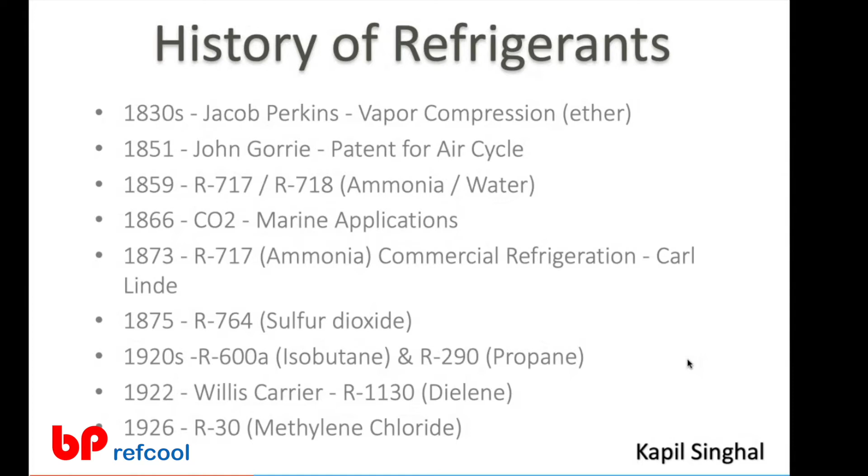But if you see all these refrigerants, there was some problem or other. Either they were toxic, or they were flammable, or they had stability issues, or they were not giving the desired cooling effect.

So what industry said was that they want something which is non-flammable, should have good stability, it should last till the system life, and should have low toxicity, because if it leaks out, there are people around, it should not be highly toxic, and it should have a boiling point of minus 40 to 0 degree centigrade. Now, this is something which is very interesting.

In the 1920s, when industry was looking for a good refrigerant, at that time they listed down this requirement of minus 40 to 0 degree centigrade. Even today, it is somewhat correct, but not for all the cases. So why this boiling point? The rest we know: non-flammable, non-toxic, good stability. We know why they were looking for those, but why were they looking for minus 40 to 0 degree centigrade of boiling point? This is something which is interesting.

As we talked about the evaporator, what they were considering at that point in time was that people are going to use this refrigerant for air conditioning. Say, for example, if you want a 20-degree temperature in the room, then you need 10-degree air temperature. If you need 10-degree air temperature, that means your coil temperature on which we are going to get the cooling is going to be around 0 degrees centigrade. Now, a 10-degree delta is what they were taking in the 1920s we are talking of.

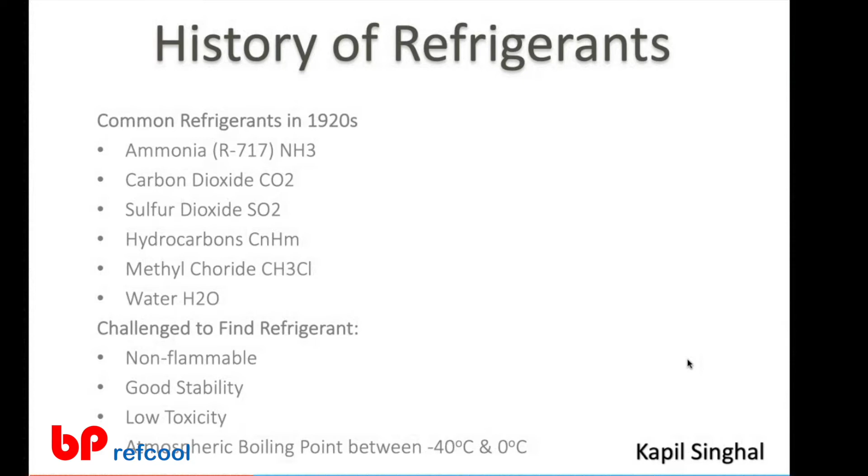In 1928, Thomas Midgley, who was working with GM, came out with a refrigerant called R12, which was known as Freon 12, because this General Motors subsidiary, Kinetic Chemicals, was then taken over by DuPont, which is now named Chemours. In 1928, he came out with 12, which was meeting all these requirements. 12 has a boiling point of minus 29, and is non-toxic, non-flammable, and all that stuff. So everything went well with 12.

There were other refrigerants which came out later on, like 22, 11, and others, because when you are developing applications, other things also came up. But the interesting thing came in the 1970s, when the concern of ozone depletion was studied by Rowland and Molina, and they showed that these CFCs are very stable, because industry in the 1920s was looking for a stable substance. They were so stable that they will not break down for hundreds of years. And if they don't break down, these molecules will reach the ozone layer in the stratosphere and then slowly break down over there. And the disaster was that the breakdown components give a chain reaction. So it's not going to just end by breaking down; the components will further break down the ozone.

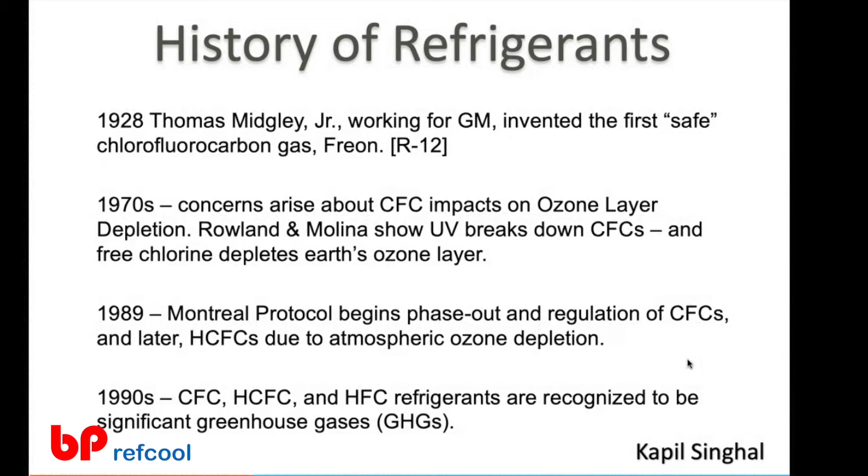That's how the key concern came in, and we had the Montreal Protocol in 1989. This protocol was to handle all ozone-depleting substances, which were majorly CFCs, but also some other chemicals, HCFCs, and other halogenated compounds. This is probably one of the most successful international environmental treaties, where globally everyone came together and very beautifully phased out most of the substances. There are still some left, in some geographies including India, which are still in use, but they are under a phase-out schedule, so they will be phased out soon. In the 1990s, CFCs, HCFCs, and HFCs were also recognized as greenhouse gases. So another set of regulations also started to come.

Now, when we talk of refrigerants, there are a number of refrigerants. In these charts, mainly we will focus on fluorinated ones, because more than 90% of the entire industry works on fluorinated refrigerants. When we talk of fluorinated refrigerants, we are talking of essentially CFCs, which are chlorofluorocarbons.

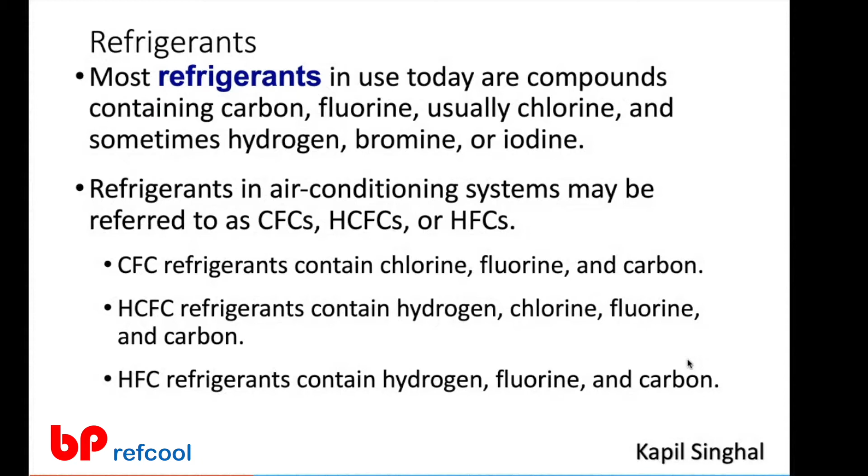These are derived from hydrocarbons, and we have chlorine and fluorine attached to carbons. So it's a chlorofluorocarbon. Then we have hydrochlorofluorocarbon. If we add hydrogen also to CFCs, the atmospheric life comes down. We'll talk about this in later charts, but it is hydrogen, chlorine, fluorine, and carbons. And then HFCs, where there is no chlorine. There are also hydrocarbons directly used, but mainly these are the three categories which are used as refrigerant in our

Now fluorine has very high stability, and it increases the atmospheric life. When it increases the atmospheric life, it is going to have a penalty in terms of environmental regulation, which is global warming. So we don't want that. But earlier, this was something which was very good, so we would use fluorine to increase the atmospheric life. But now we have another challenge of GWP. Chlorine increases the ozone depletion potential. So we don't want higher chlorine, or in some cases, zero chlorine.

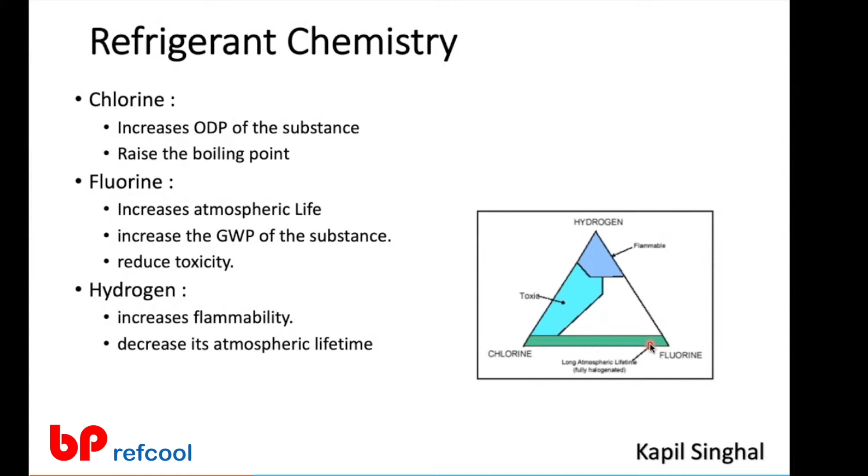So we want a balance. There are problems and advantages of all three. What we need to live with is figuring out what is best for which application. That's why it's not one single refrigerant fitting all applications. There are different refrigerants for different applications. If we talk of CFCs, which is chlorine, fluorine, and carbon, since there is chlorine, there is ozone depletion, because the chlorine is going to break down the ozone layer. So it will make O3 to O2, and that's how it's going to have a problem.

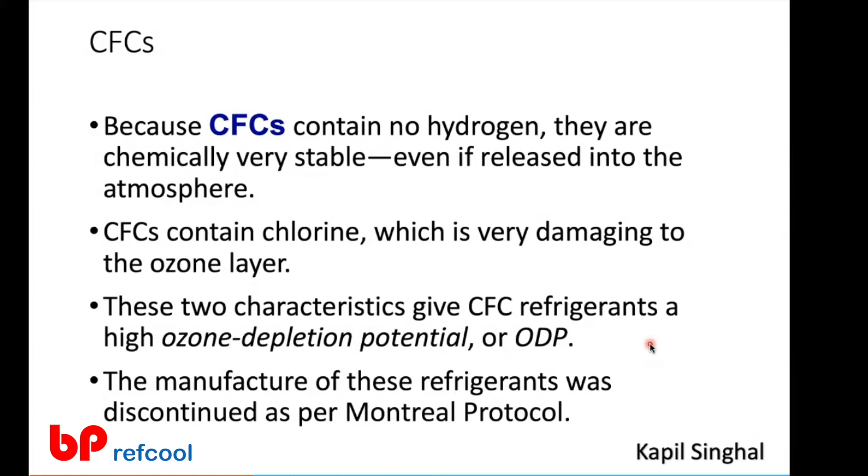Manufacturing of CFC and CFC based equipment has been banned across the globe now. So there is no CFC based equipment or CFC which can be produced for refrigerant application. For certain applications, there can be some essential use which may still be allowed, but for most it is already phased out.

HCFC, as we were talking, when we add hydrogen, we reduce the atmospheric life. Say, for example, for CFCs, if the atmospheric life is, say, 700 years, if we add hydrogen, it comes down to say 10, 12, or 15 years. Now, this 10, 12, 15 years is very good as compared to CFC, but it is still not very good because global warming still has a very big role to play.

In HCFCs, chlorine and hydrogen are both present, so the ability to damage ozone comes down drastically. Say, for example, if CFC 11 or 12 was 1, for HCFC 22, it's going to be 0.055. So yes, it comes down, and that's why there is a different phase out schedule. So 22 is still being used in India. It's under a phase out schedule, so it's going to be 0 sometime. But as of now, some amount of 22 is being used.

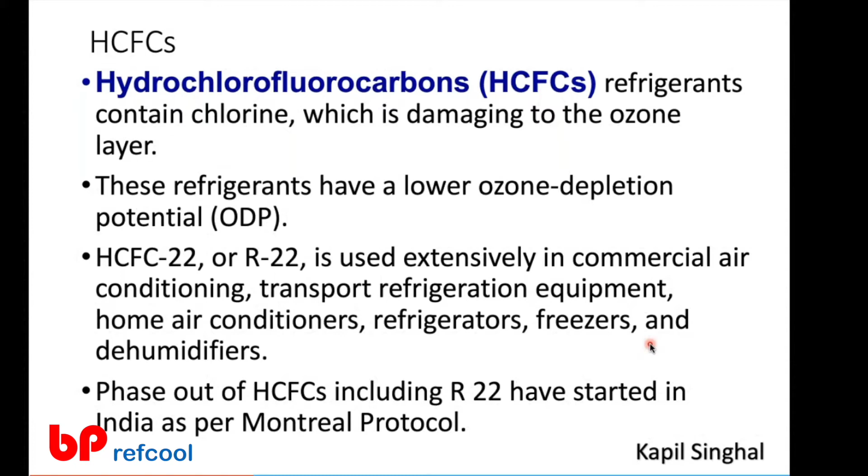If we remove the entire chlorine, we are talking of HFCs, hydrofluorocarbons. Since there is hydrogen, the atmospheric life is very similar to what we have for HCFCs. And since there is no chlorine, there is no ozone depletion issue with it, but there is still a global warming issue. So we need to figure out how to handle this global warming issue.

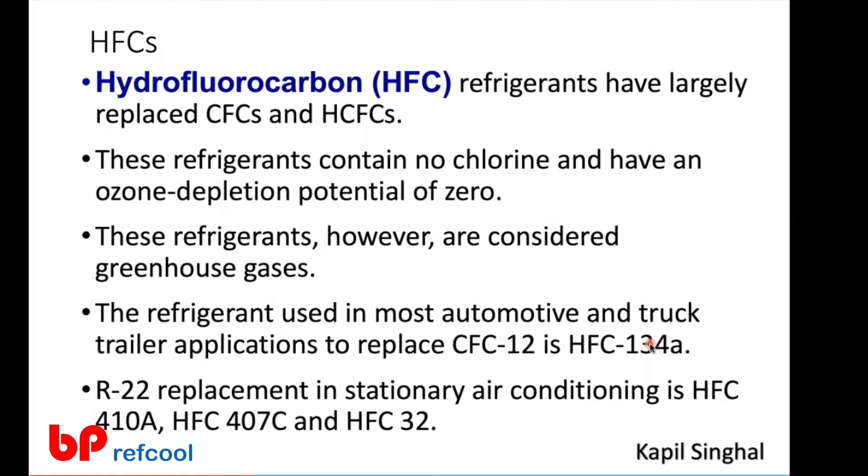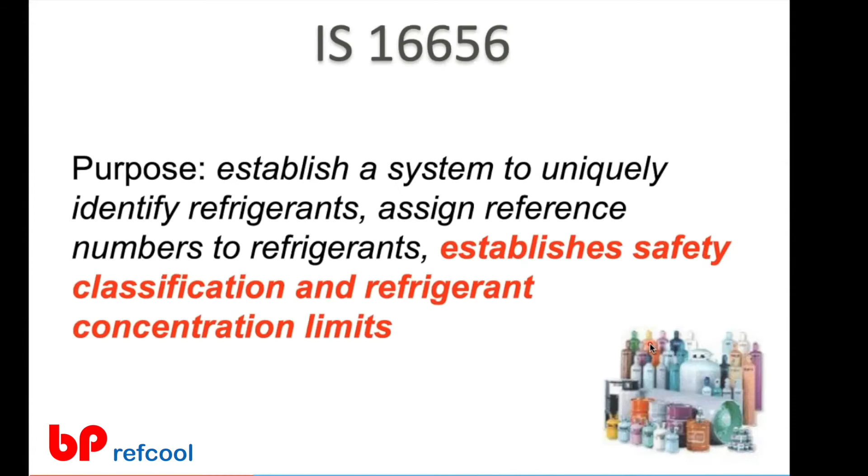So we talked about the basics and the history. Now we come to the important aspect, which is also probably part of your curriculum: the nomenclature and the safety classification. When we talk of nomenclature, normally a refrigerant is given with a number. It may start with R. R normally stands for refrigerant. It can be CFC, HCFC, HFC, PFC, or hydrocarbon.

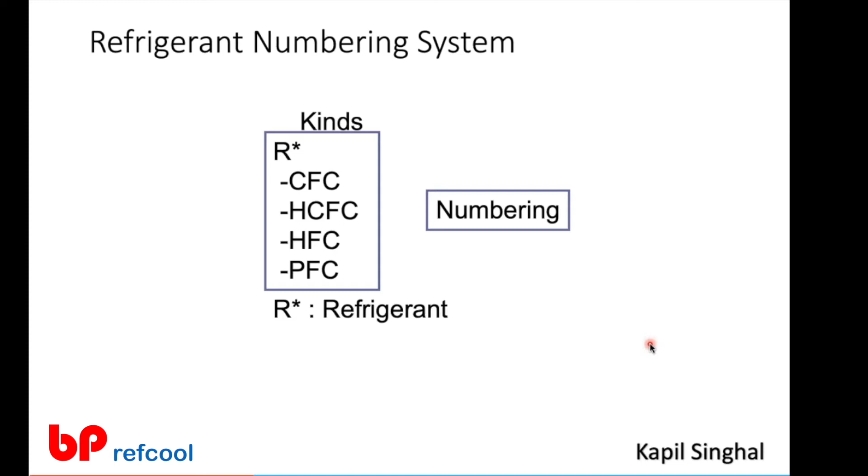Sometimes instead of R, you may find people writing CFC 11 or HCFC 22. That is also used in industry. And then there would be a number. Now, how this number comes in is this formula.

So the number is CHClF, which is carbon, hydrogen, chlorine, and fluorine. These are the four key things which we need to know. Now, if you see here, this is the formula. R, which is the refrigerant, K minus 1. What is K? K is carbon, minus 1.

So if the number of carbon is 2, we are going to put 1 over here. If the carbon is 1, we are not going to write anything because 1 minus 1 is 0. Now, L plus 1 is going to be second from the left. What is L? L is hydrogen. So if hydrogen is 2, we are going to write here 3, and N is the number of fluorine.

So if we are talking of a molecule which has 2 hydrogen and 2 fluorine, 0 chlorine, then for 2 fluorine we have 2 here, and 2 hydrogen means 3 here. So we are talking of 32, and since the carbon is only 1, it is 0. So R32, which is a commercial refrigerant, has 2 fluorine, 2 hydrogen, and 1 carbon. This is the way the nomenclature normally works out.

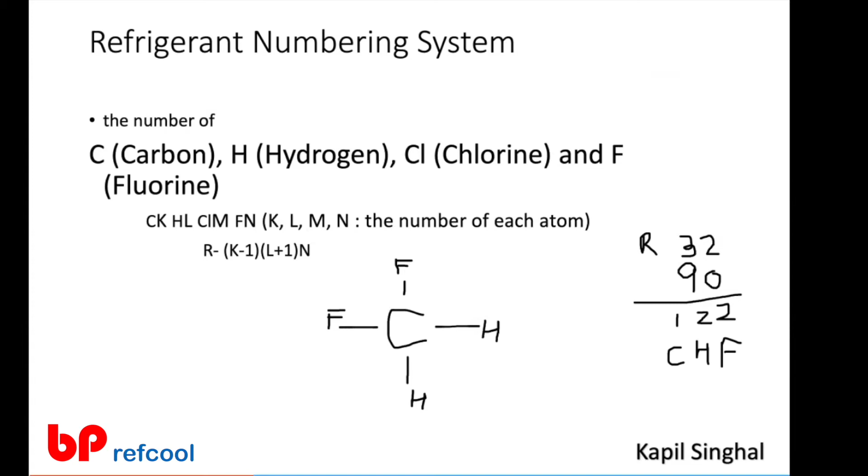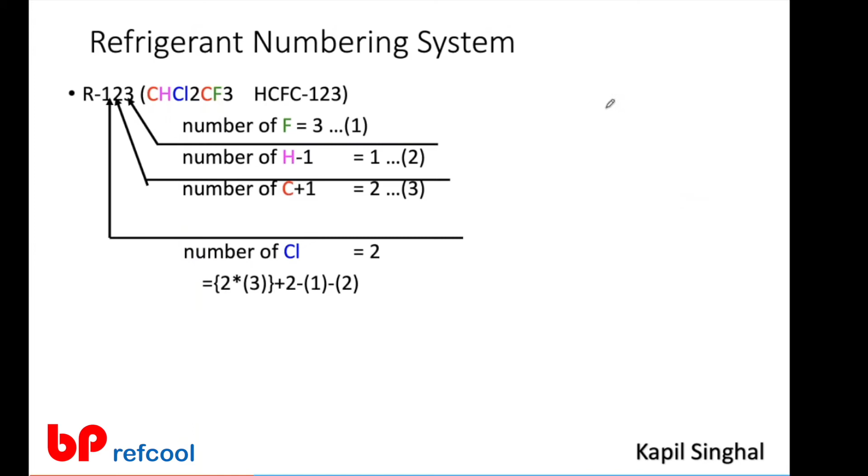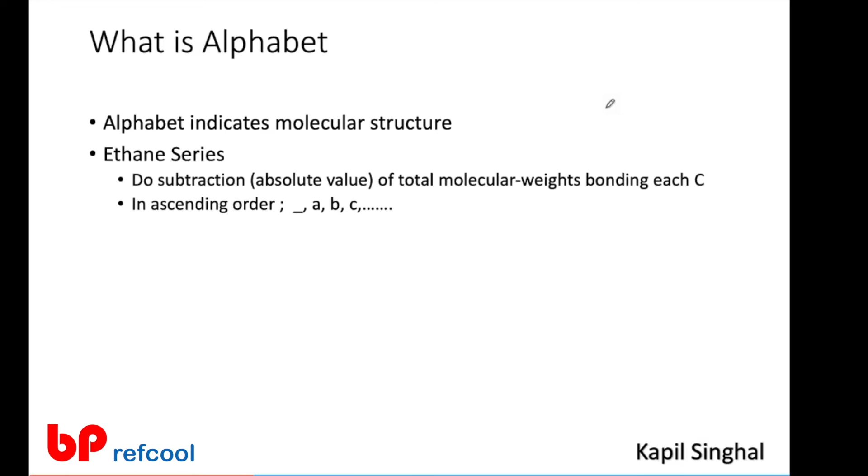There is also sometimes an alphabet which is assigned. What is that alphabet? That alphabet is for isomers. Say for example, for 134 or 134A, in both cases we have 2 carbon, 2 hydrogen, and 4 fluorine. Now there are 2 ways of putting that across. One way is where on 1 carbon there are 3 fluorine, and on the other carbon there are 2 hydrogen and 1 fluorine. Whereas another way is where each carbon has 1 hydrogen and 2 fluorine. This way or that way makes a significant difference in the properties of the refrigerant.

Since these are isomers of each other, we need to differentiate them in the number. To differentiate, we give A, B, or a small alphabet. How that happens: if we take this one, where there is no difference in the molecular weight attached to this carbon versus this carbon, if we subtract, it's 0. Here, if we subtract, it's 36. So 0 and then 36. If there was any other option, say 40 or 50, it could have been 134B or something, but in the 134 case, it's only 134 or 134A. So this is how we assign 134 or 134A.

Just to give you an understanding of what we have done here: there are 3 fluorine and 2 hydrogen on one carbon, and 1 fluorine on the other carbon. If we take 3 fluorine, and the molecular weight of fluorine is 19, so 19 into 3, minus hydrogen 1 into 2, minus fluorine 19 into 1, is equal to 36.

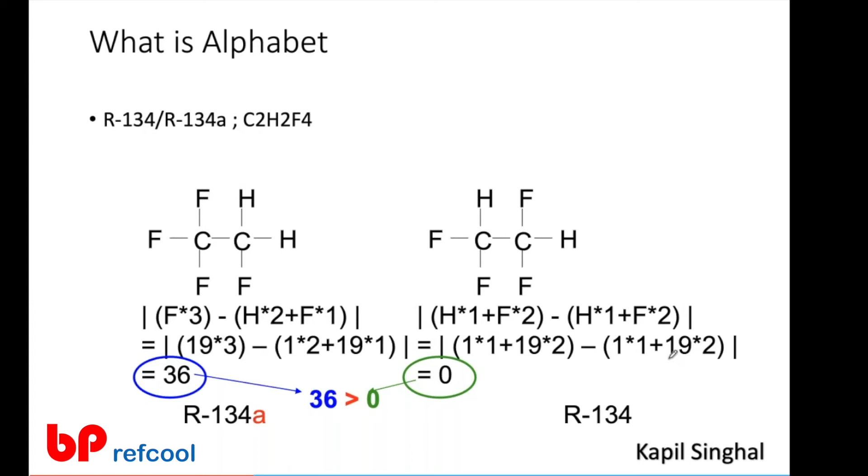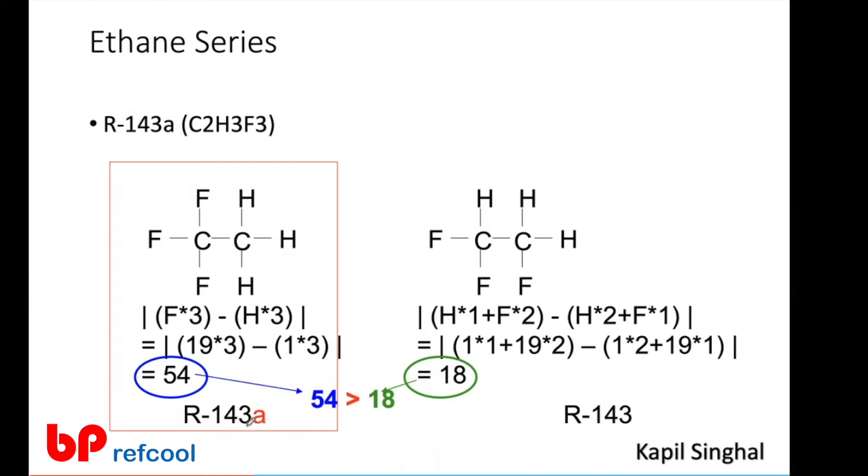So that's what we are doing, the calculation over here and here, and that's how we calculate whether we are going to give A, B, or C. Now, if we are talking of an ethane series, this is the same where we have A or B. So this 18 versus 54, so we got A, and this is the minimum which we can get.

Now, if we talk of propane series, since we know there are 3 carbons, the terminal carbons are going to behave like an ethane series, whereas the central carbon has only a couple of options, because we have only 2 open spaces or 2 valencies open for this. So it can be either 2 chlorine, 2 fluorine, 2 hydrogen, or a chlorine fluorine, hydrogen chlorine, or hydrogen fluorine.

So if we give a number to all of these, which is A, B, C, D, E, F, so if we give a specific alphabet assigned to this middle carbon, then we can come out with the refrigerant number easily. So for 245fa refrigerant, we do the same way. We calculate the total number of fluorine, hydrogen, carbon and chlorine for this molecule. Now, what would be there in the center is given by this first alphabet, which is F here in this case of 245fa.

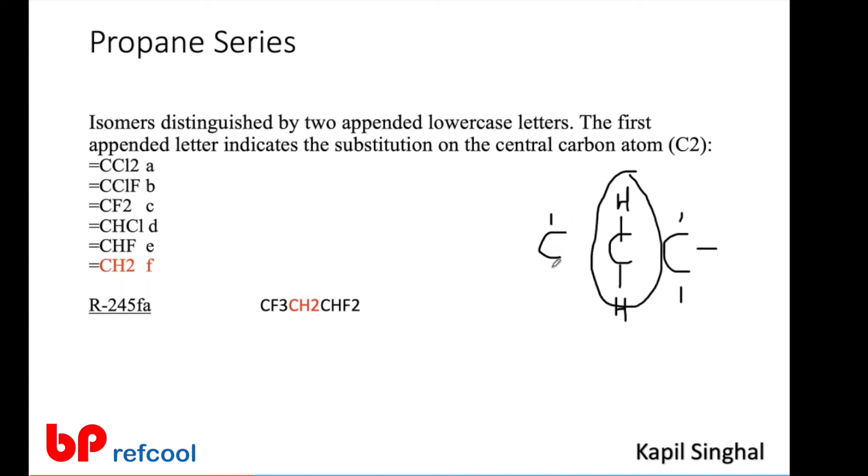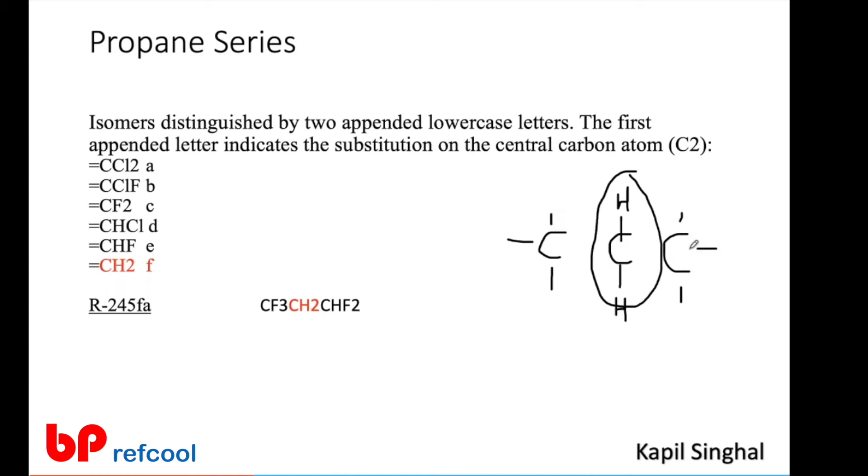If it is F, it means 2 hydrogen. Now in this case, the center carbon, which is this one, will have 2 hydrogen. Now if this will have 2 hydrogen, rest everything is going to be assigned to these, and this now will be calculated based on what we see in the nomenclature for the ethane series. Fine. So it's very simple. Isomers a, b, c, d again will work out based on the molecular weight difference between this carbon and this carbon. So that's how it's going to work out.

So when we talk of methane series, ethane series, propane series, then beyond these, there are zeotropes, say 400 series, azeotropes and zeotropes are blends. Now these blends are something which may or may not behave like one. So if they try to behave like one, we call them 500 series azeotropes. If they fractionate in the vapor phase and have a differentiation, then we call them zeotropes, which is 400 series.

Now, how the number is assigned to a refrigerant, how 407C is called 407C and all, is important. For zeotropic blends, when there can be a fractionation happening, if anyone comes up with a blend, say for example, a blend of 32 and 125, if one company comes out that, hey, we want to make a refrigerant with these 2 components, we go and register it with ASHRAE. ASHRAE gives it a number, say 410A. If another company comes in and says, hey, we want to use the same components, but in a different ratio, then that ratio is also going to be written down and another alphabet will be given for the same number. So 410B will be given.

And note, these A, B in the blends are the capital ones, whereas in the isomer, it was the small one. So A, B, C, D, E will be given to the different compositions for the same components. If the components also change, if we add 134a into it, they are going to give another number, say 407. Now again in 407, if there are 3 components and the composition keeps changing, then A, B, C, D, E, F will be continued to be given. And 407F is also a very popular refrigerant gas. So there can be a very good number of combinations of percentages which can be common.

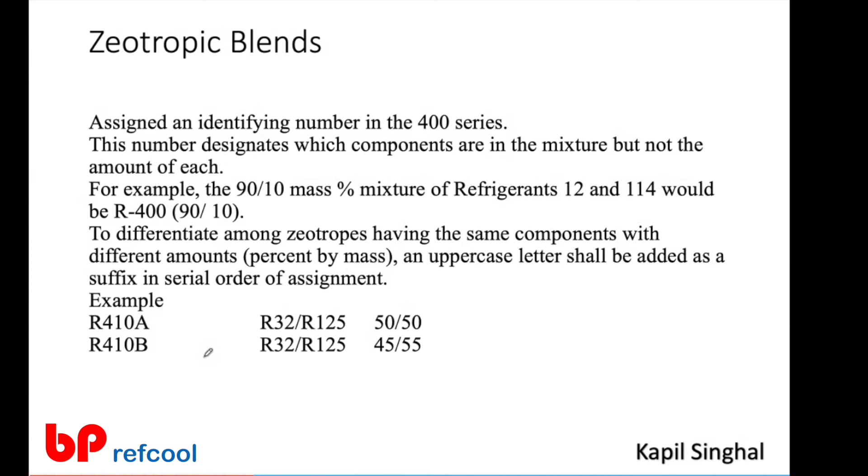Azeotropes, as we know, don't fractionate. So here the nomenclature remains the same. Anyone who comes up with a new mixture goes and registers with ASHRAE, a number is given, and then based on the composition, A, B, C, D, F is given, in the sequence of how they are registered with ASHRAE.

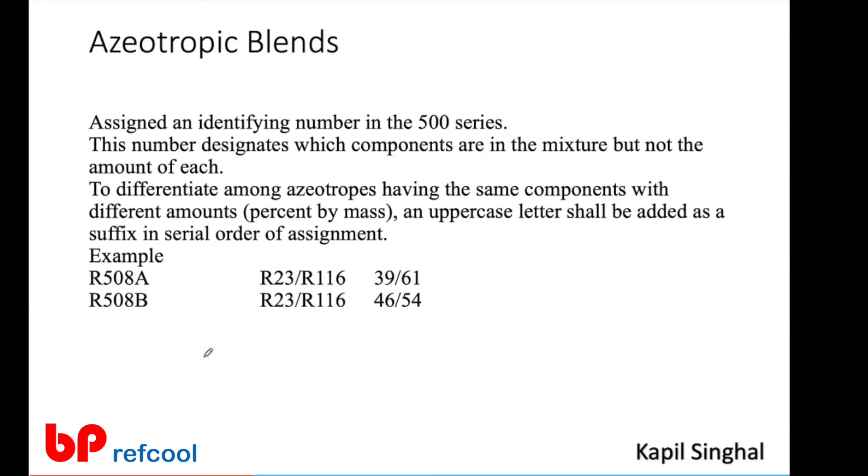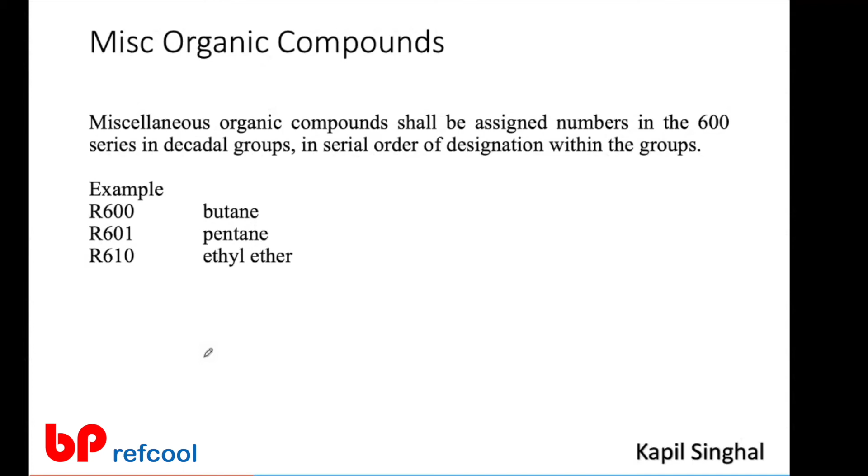Then there are miscellaneous organic compounds, so butane, pentane, ethyl ether, so 600, 601, 610. Some inorganic compounds start with the 700 range. When we talk of the 700 range, the molecular weight is attached to it. So 717 is ammonia, because ammonia is NH3, you have N for 14 and then H 1 into 3, so it's 17. Carbon dioxide and nitrous oxide both are 44, so nitrous oxide is given A, so 744A.

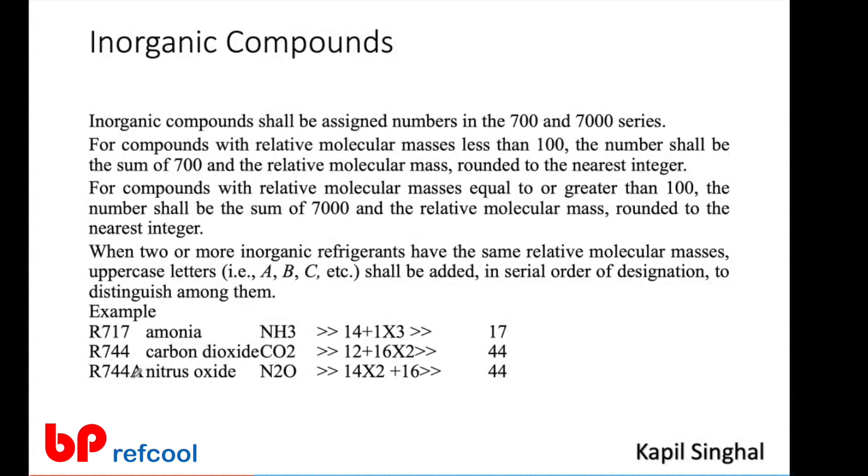This is only for theory. Normally in practical circumstances, ammonia is used, carbon dioxide is used, but nitrous oxide, I am not aware of if there is any usage.

Propene series, if we have a propene, means there is a double bond, unsaturated one. So in that case, when you see here, 1234yf, this is actually a replacement of 134a, and this double bond helps in reducing the atmospheric life of the molecule.

If you remember, when we were talking about the CFCs, we were talking of atmospheric life of say 700 years. We came down with adding hydrogen to say 10 years or 13 years. If we add a double bond, it becomes unsaturated, and then the life will become like 1 day, 2 days, 5 days, 10 days. So if the life of the molecule comes down, it's good for the environment because it's going to break down easily. So it's not going to last long, it's not going to contribute to global warming for very long, so the global warming potential is going to be very, very small.

But imagine if this molecule breaks down in the environment, we also need to consider that it should not break down in the system. So this should remain stable in the system, but when it comes into the atmosphere, then it should be able to break down. So purifying these chemicals, distillation of these refrigerants which have unsaturates, is something important, because we don't want any impurity which is going to adversely impact the life of the refrigeration air conditioning system, because the life of the refrigeration air conditioning system can be anywhere from 5 years to 50 years. So we want a refrigerant that is very stable in the system, unstable outside the system.

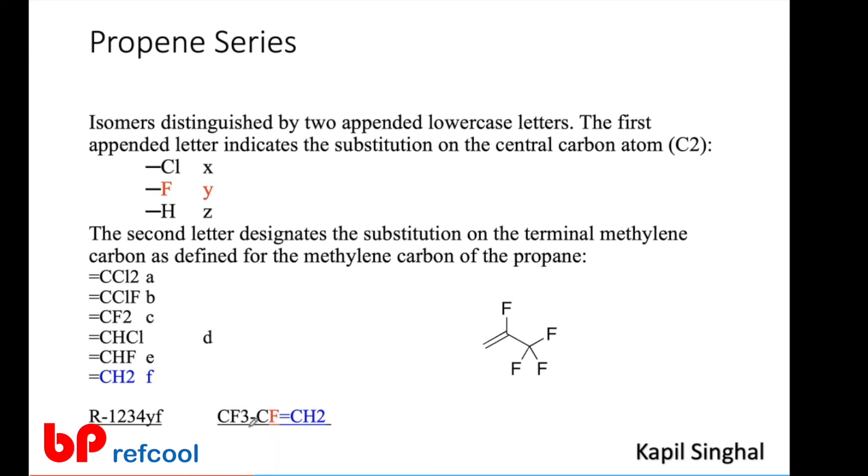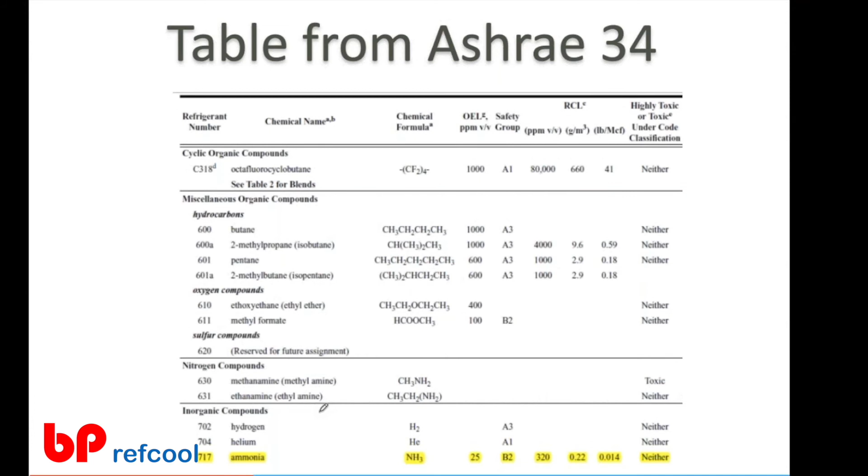So say for example for 1234yf, if we add 90, we are going to get the number of fluorine, hydrogen, and carbon, and we need to come out with the chlorine. In this case of 1234yf, there is no chlorine. Since it is Y, the center will have fluorine, and then F means the carbon next to this, which is this one, will have two hydrogens. Whatever is left will be on this carbon, which is CF3 CF CH2. Fine. So this is about the nomenclature of the refrigerants, and the list of the refrigerants is also available in ASHRAE Standard 34. You can see there are a number of things available on this.

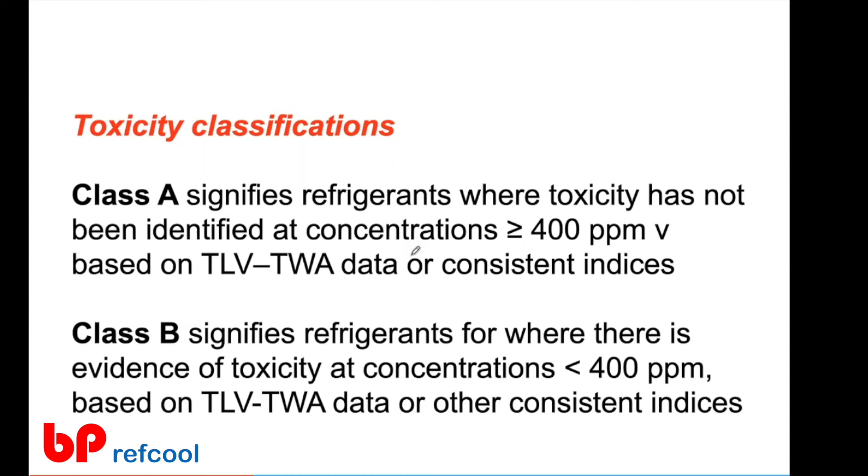Now when we talk of toxicity, or the safety classification, there are two things. One is the toxicity, second is the flammability. If a substance or refrigerant is practically toxic, we call it class B, which means it's practically toxic in the system. It is based on TLV-TWA, which is threshold limit value on time weighted average. It means if a person on a long term is exposed to this molecule or substance, then over a period of time, it's going to have an adverse impact on that person. So it's a long-term exposure classification, where we classify as of now as A or B. A is something where we are not going to see any major impact, so there we call it practically non-toxic, and B as toxic.

Flammability: in toxicity it's A or B, in flammability it's 1, 2, 3, and 2 is further subdivided into 2 and 2L. Now for the flammability classification, if there's no flame propagation, meaning it's practically non-flammable, we call it 1, and if it is highly flammable, we call it 3. If there is flammability but we feel we can manage it by looking at the flame properties, then we call them 2 or 2L. So if there's no flame propagation, 1.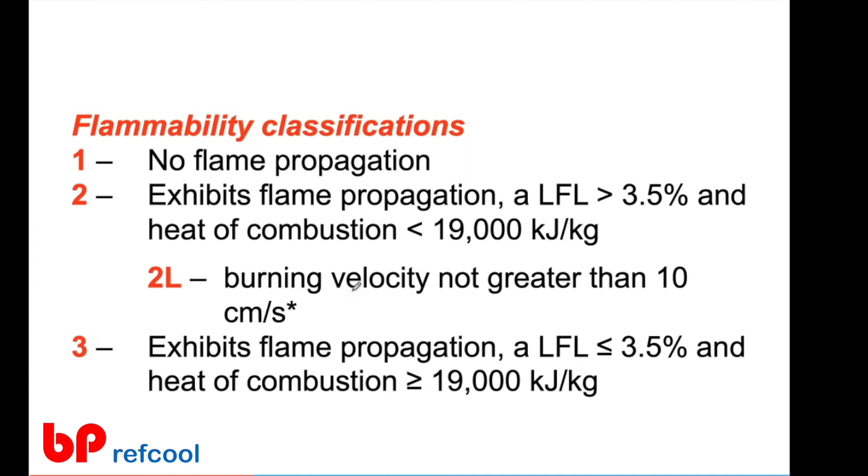If there is a flame propagation and there is an LFL, which is lower flammability limit, of more than 3.5%, and a heat of combustion less than 19,000 kilojoule per kg, then we call it 2. If it is more than 19,000 and LFL is less than 3.5%, we call it 3. And for all 2, if there is a burning velocity of less than 10 centimeter per second, then again we call them 2L refrigerant. So we have the safety classification, we have A, B, and then we have 1, 2, 2L, and 3. Now we can put all the current refrigerants into this classification matrix.

So what you see on the top is A3 and B3, which are highly flammable, non-toxic versus toxic, and A1 is the class where most of the refrigerants used to work, where it is going to be non-toxic, non-flammable, and we can easily use. So 134a, 410A, all of these refrigerants are A1.

R32, which is an A2L refrigerant, is common these days. We also see propane in a lot of applications, including room air conditioners. For a limited quantity of refrigerant, we can safely manage propane. And when we talk of safety classification, we need to manage that safety aspect of that refrigerant.

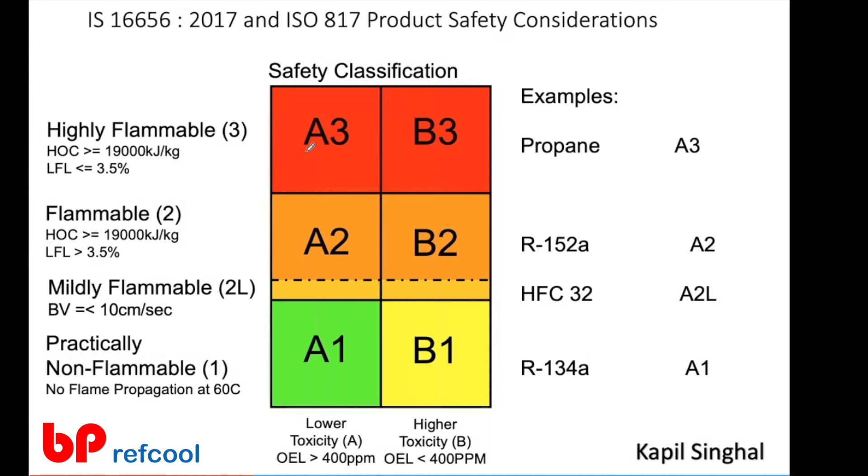It's not that we can't use it. We can use any of the refrigerants. The only thing is we need to be sure of how to handle and manage that specific refrigerant in that system. So if we look at this graph, anything coming towards the red is higher risk versus yellow.

From a flammability perspective, there are two important things: one is the chance of the flame, and second is the effect of the flame. How easy or difficult it is for a substance or refrigerant to get ignited is what we discuss in this chart, and the next chart would be what happens if there is a fire of this substance. Here there are two aspects: the minimum ignition energy, and the lower flammability limit. What is the minimum amount of refrigerant required to be present in the air which can make it ignitable? And what is the minimum ignition energy required to ignite that substance?

So one, there needs to be a fuel. Second, there needs to be a source of fire. A 5 ampere switch or static energy, all these have different minimum ignition energies. The higher it is, the bigger the energy source we need. A small spark can ignite all these, but not 1234yf. And a very small concentration in air can ignite these, but not this. And you don't see R32 here, which is commercially available, because its lower flammability limit is 14. So it's very far.

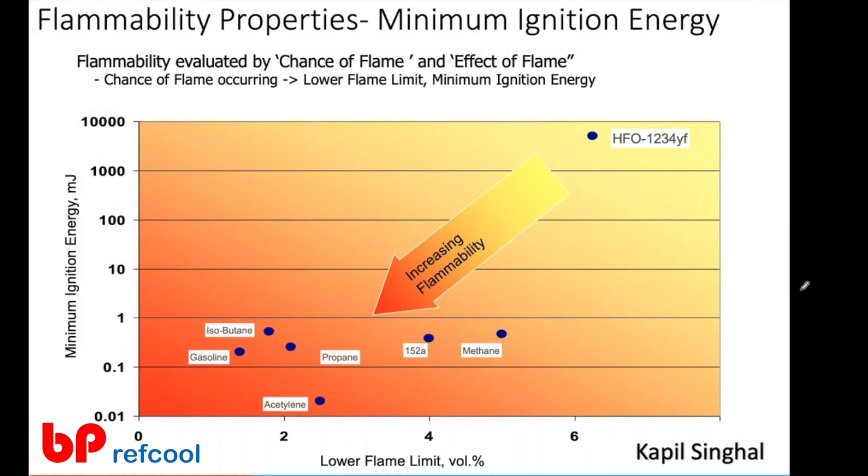The effect of flame is very similar. If there is a higher impact from the burning refrigerant, it means it is generating too much heat and it flows very fast. Burning velocity is higher and it produces a lot of heat. It's dangerous. Whereas a substance which has lower heat of combustion and does not flow may die out on its own. That is lower flammability, which can be classified as A2L, with heat of combustion less than 19,000 kilojoule per kilogram and burning velocity less than 10 centimeter per second. You can also see 134a, which is A1 here because there is no burning velocity. So it's an A1 refrigerant.

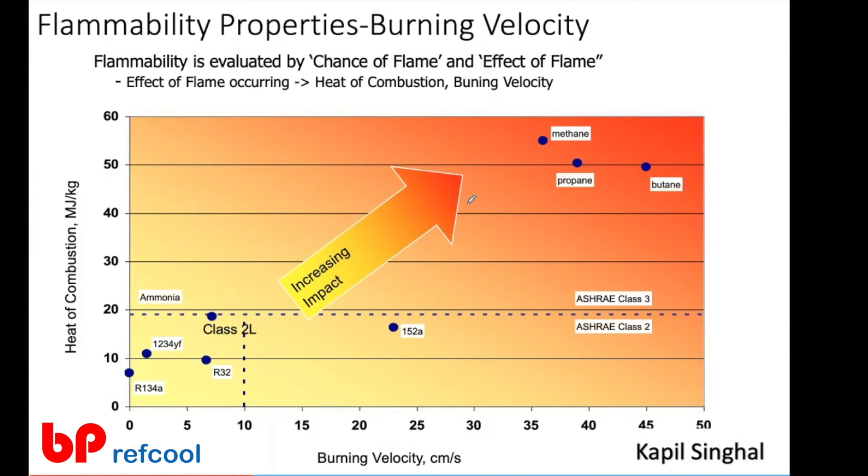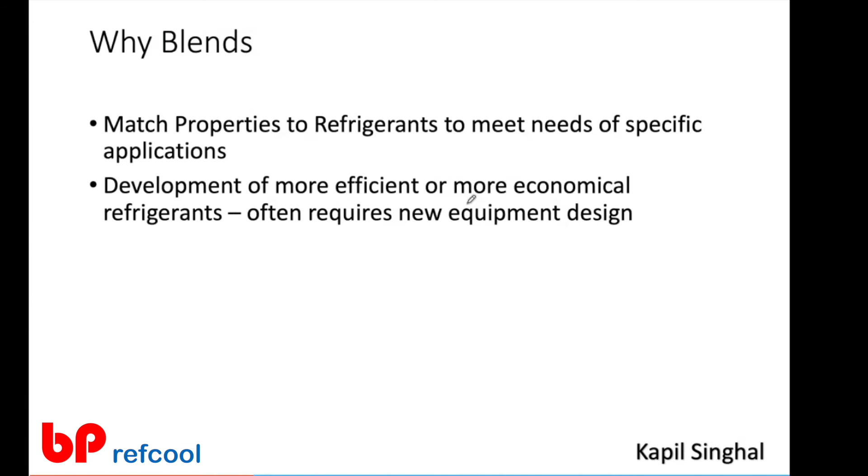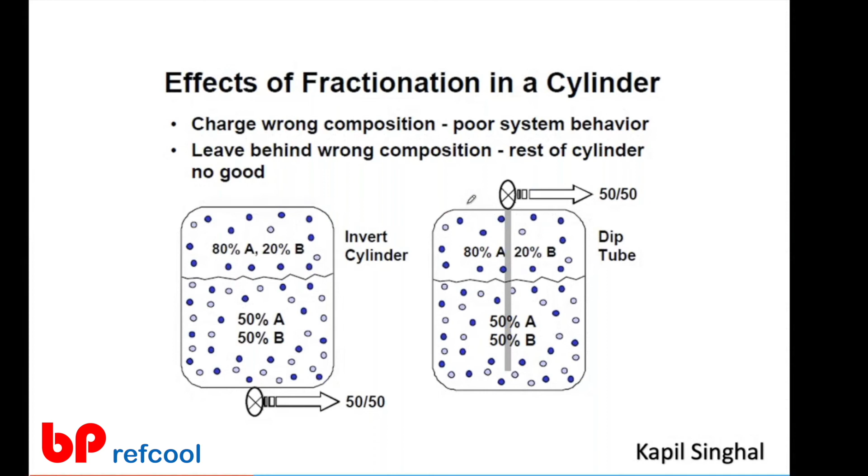Another aspect comes in the refrigerant blend. As we know, environmental regulations are forcing these refrigerants out. There can be different refrigerants coming out as a blend. In a blend, we match the properties of a refrigerant by mixing two or more refrigerants. You need to always take liquid from the cylinder so that you get the complete fraction. Otherwise, in the vapor phase, there can be fractionation, specifically in zeotropic blends.

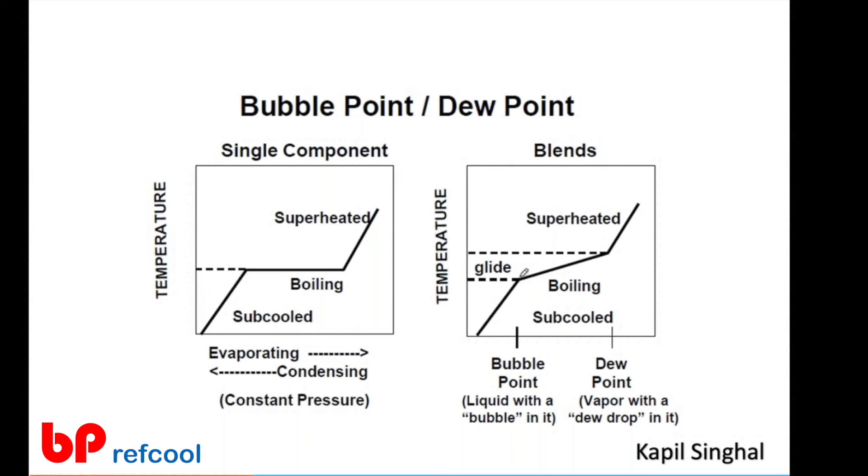In a normal cycle, the boiling is going to be straight, meaning it's at a constant temperature. Whereas in zeotropic blends, the boiling is going to start at one point and end at another point. The temperature difference between these is called temperature glide, and this gives us a very interesting view when we are designing or managing the heat exchangers, the evaporator and condenser. So we need to look at the dew point and the bubble point and take them into consideration.

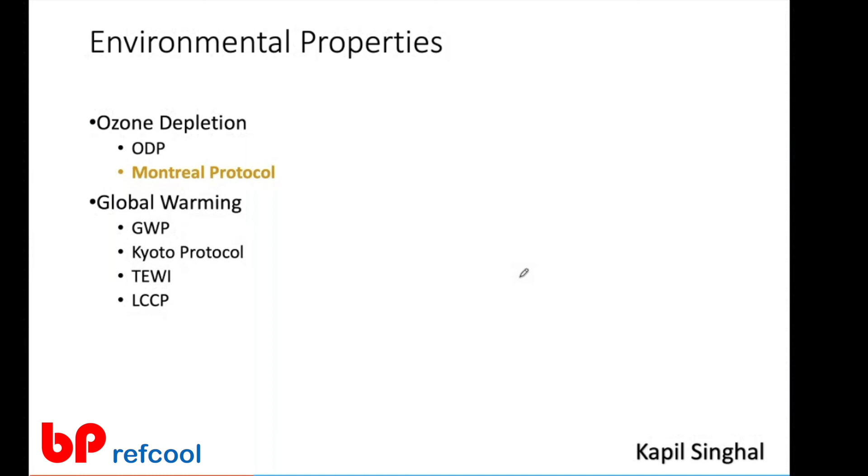Refrigerant properties are important. First of all, environmental properties: we talked about ozone depletion, we talked about the Montreal Protocol. Global warming also, we talked about global warming. So the potential associated with any gas for global warming is called global warming potential. There are a number of things attached to it: Kyoto Protocol, total equivalent warming impact, life cycle climate performance. These are all the environmental properties which are assigned to each and every refrigerant.

Now, from a thermodynamic perspective or a refrigeration system perspective, there are some more properties which are required. One is the refrigeration capacity. This is very important. When a refrigerant is entering the compressor, based on the specific volume of that refrigerant at the entry of the compressor, we come out with the capacity to compress, and what the cooling generation is going to be. So different molecules will have different refrigeration capacity. The size of the compressor can be larger or smaller based on that specific volume. So that defines the refrigeration capacity of a refrigerant.

Operating pressures: we want the system to be operating both in the evaporator and condenser at positive pressure, and it should not be very high positive pressure, because if it is too high, we have a challenge. If it is at negative pressure, we can manage, but then we need to design our system, which makes it slightly complex to design to operate at negative pressure, under a vacuum evaporator kind of system.

The compressor also requires lubrication, and since the refrigerant is flowing, we want good oil miscibility so that it lubricates the compressor, and it should not leave the oil behind in the expansion valve or in the evaporator, because at the lower temperature the miscibility capacity, or the oil carrying capacity, of the refrigerant may come down. So we want very good miscibility. Oils are specifically configured for some of the applications to meet this desired property.

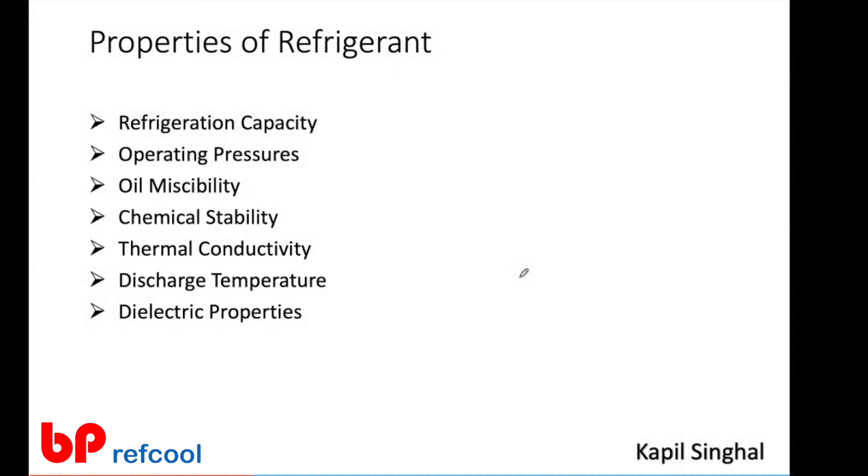We also look for good dielectric properties, because nowadays a lot of compressors are hermetically sealed and the motor cooling is done directly by the refrigerant. If we are using the refrigerant directly for motor cooling, we need high dielectric properties so that we can continue to run the system for long. So these were the properties.

There are a number of new refrigerants coming up. Here, these are R134a alternatives. R134a is tetrafluoroethane, which is used in automotive air conditioning as well as in refrigerators and chillers. Based on the classification, green is A1, non-toxic, non-flammable, A2L is yellow, and A3 is red. For R134a, which has a global warming potential of 1430, the substance which can give a very good improvement in terms of GWP is going to be mildly flammable. So there are not very good options available at very low GWP in this case.

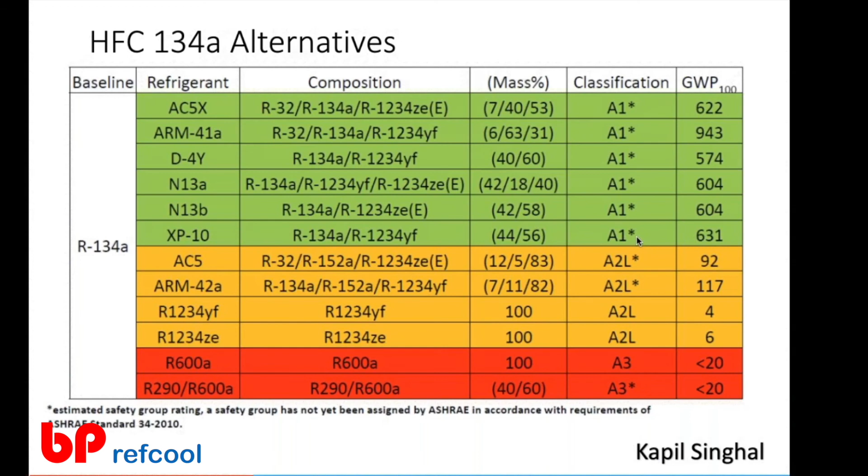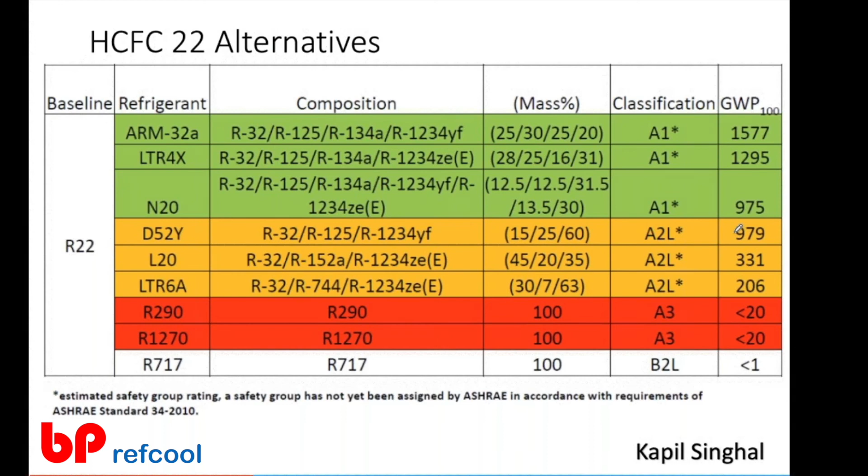R22, commonly used in room air conditioners, is now moving to R32 and other refrigerants. Same story here. If we need to go down in terms of GWP, there are not very good options available in green, not very good options in yellow. Yes, in A3, propane is a very good refrigerant which is used. R32 is also used, which is 675 somewhere here in the A2L category. But yes, not very good options available.

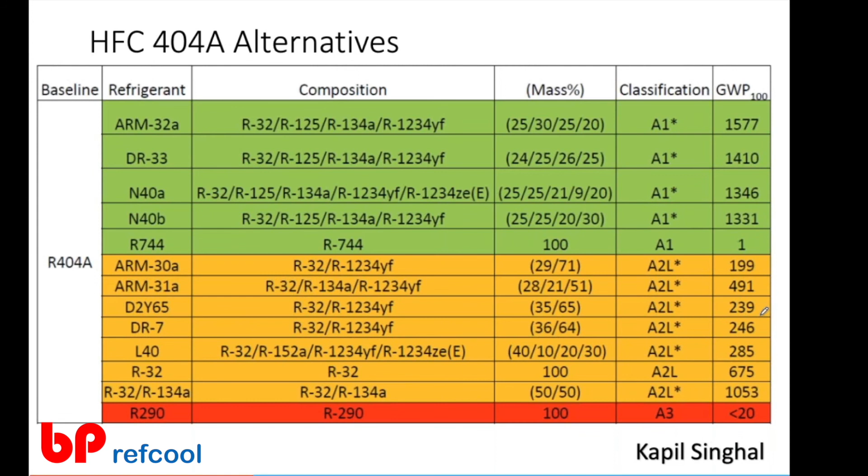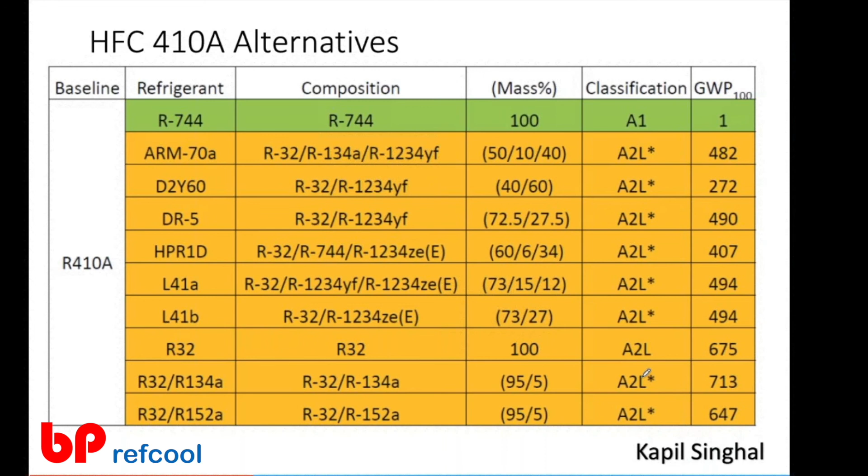So this is all I have, and we have just 3 minutes left. I'm sorry, this was too much to cover, but this is the best I can do in this short time. If you have any questions, any of you can just throw them to me.